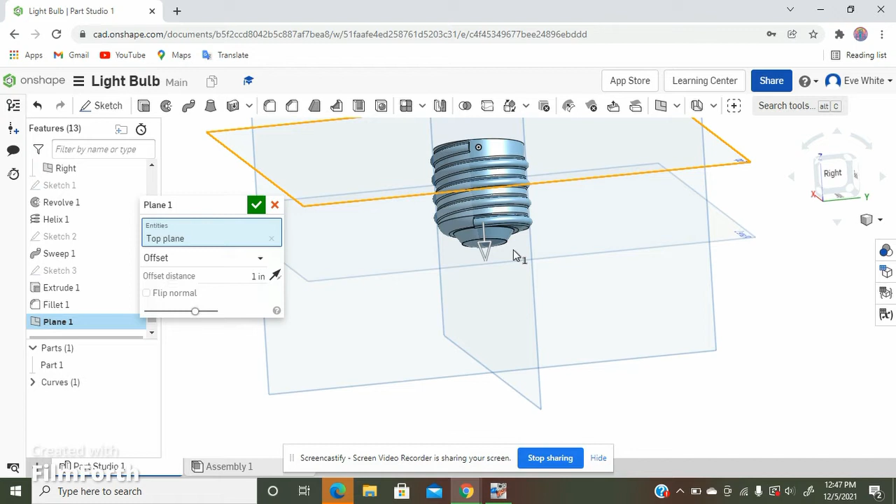To do that, first I need to create an offset plane from the top plane, which will be just below the base of the light bulb. So we click the arrow and drag it down so that it's below the base.

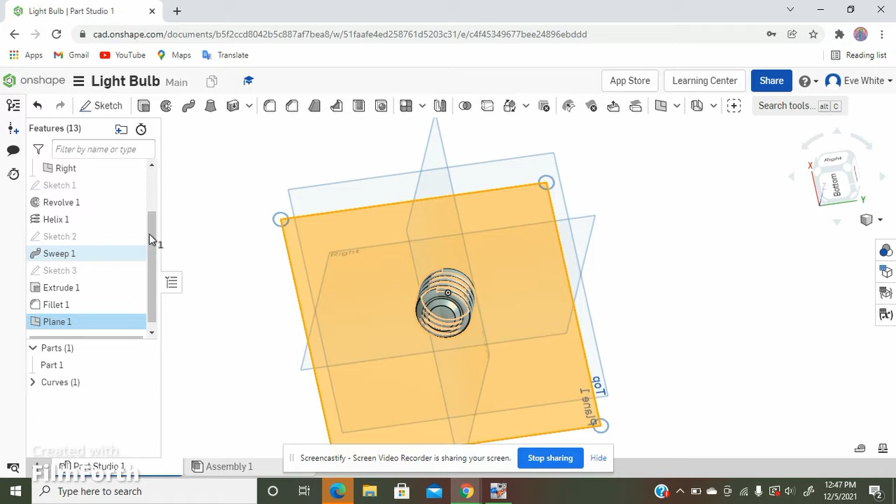Alright, that's good. So now I'm going to click plane 1, then click the sketch button, because in this sketch I need to trace out the part of the thread that I need to remove. To get an exact tracing, I need to use the use tool.

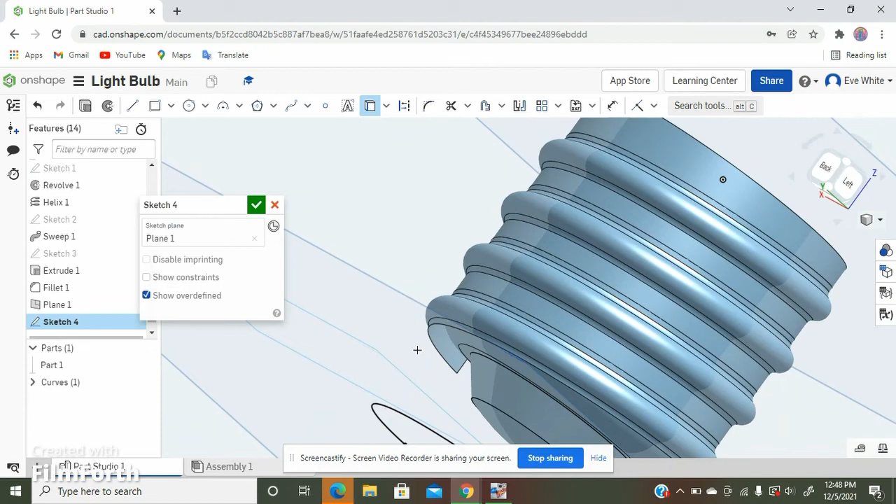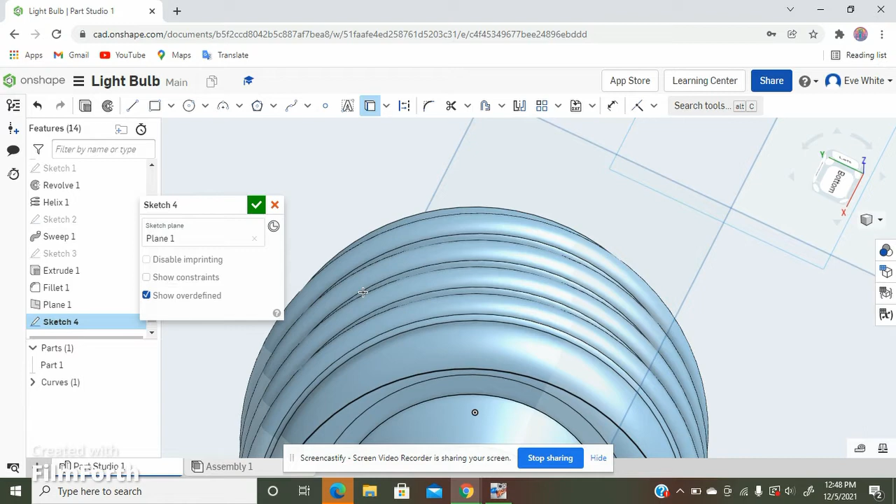The edge of this thread is here, and just where I want to stop removing thread, I need to click on this intersection point here. Now I have to click on the outer edge, if I can do that. Oh, looks like I can't. But that's okay, because I can just estimate when it comes to the outside of the thread.

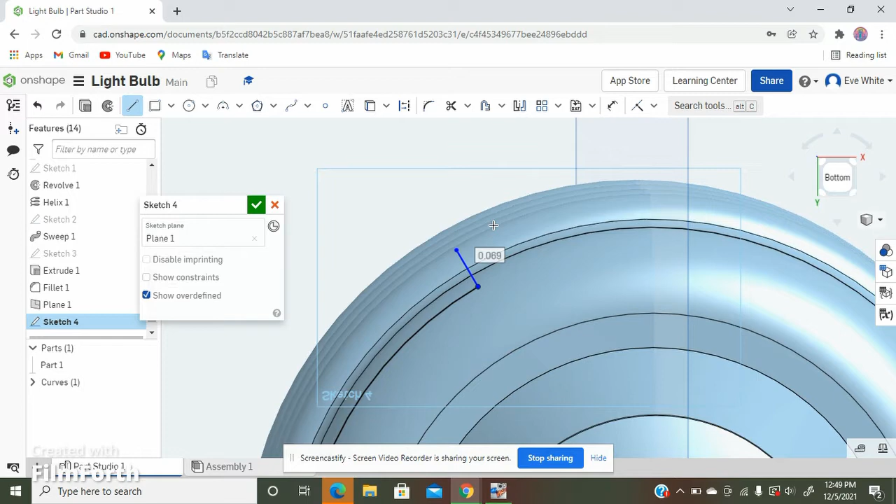So what I need to do is make a straight line here, double click, and this is where I want to stop cutting the thread, because as you can see this is where it stops going over the base, hanging out outside of the area.

Now, since I already have a line here that connects from the interior to the exterior, I just create a line connecting those two.

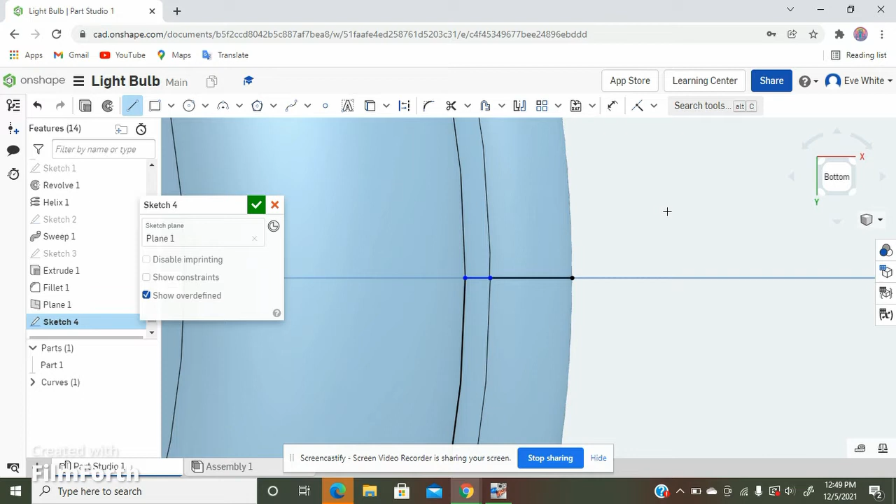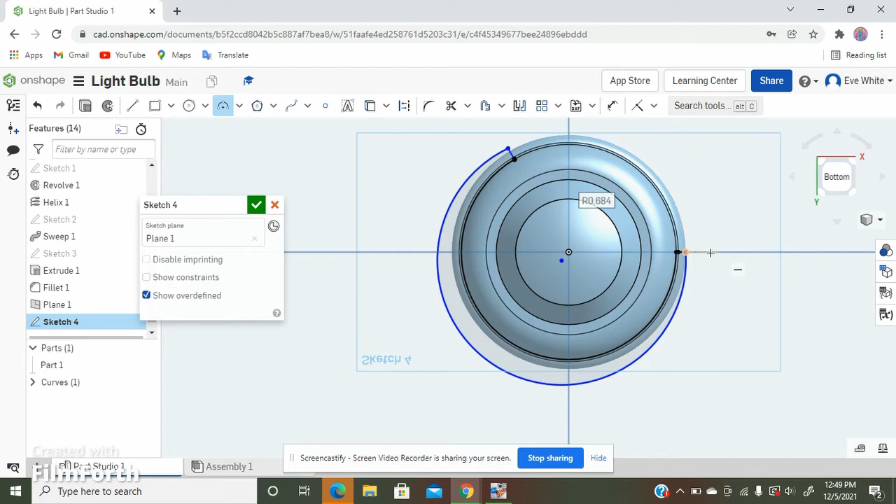And now to connect all the way around, I am going to click on the Arc tool, click on the two outside edges, and then make it big enough to where it does enclose the entire area that I need to remove.

Now you can see that this is a closed shape because the interior is slightly darker than the rest, and so that means we are ready to exit out of this sketch.

Okay, so now I'm out of the sketch and need to make an extrusion of the shape that goes through the thread. Sorry, I kind of lost my train of thought. This definitely shouldn't be this big and shouldn't be on add, it should be on remove.

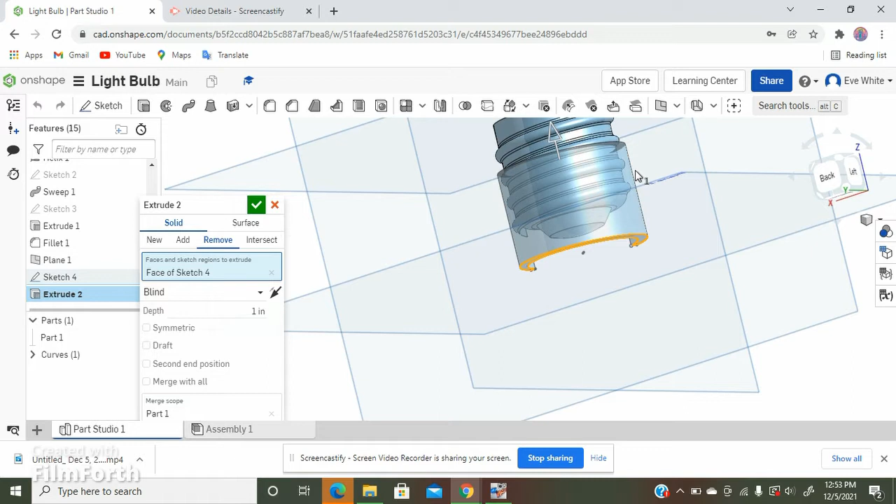It's going the wrong direction, so to change direction you just click on the arrow. I don't want this much removed either, so you can just take the arrow and drag it to whatever depth that you want.

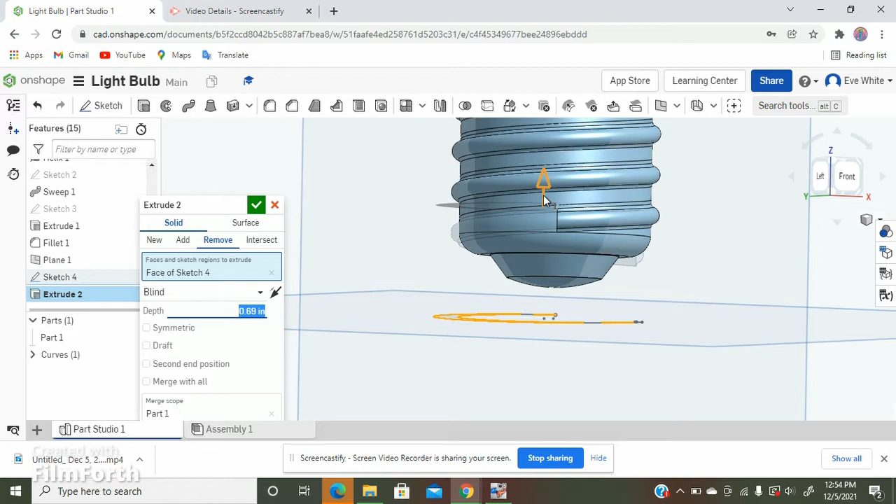My computer is running kind of slow, so it's catching up right now. Okay, this looks like a good depth. Oh, it's a little too much depth though, so just drag it down slightly so it doesn't extrude in as much.

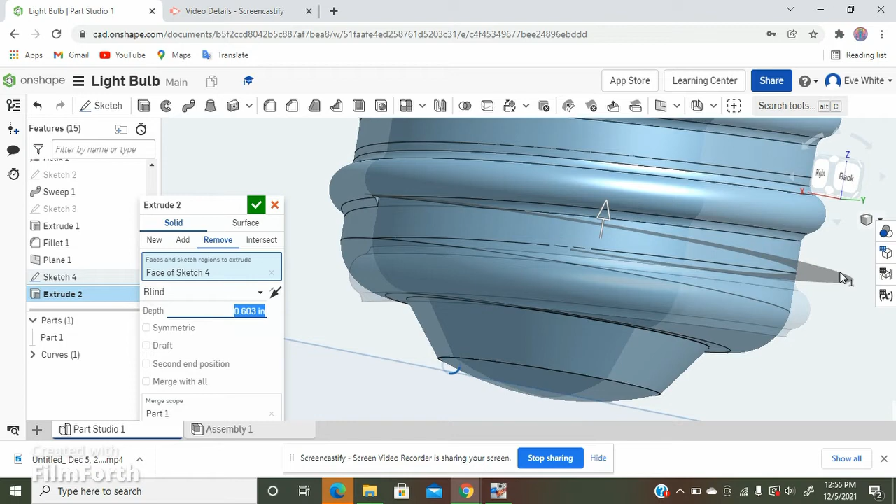Okay, let's see how much this removes. Again, my computer is laggy. It often is. You just gotta do what you gotta do, you know?

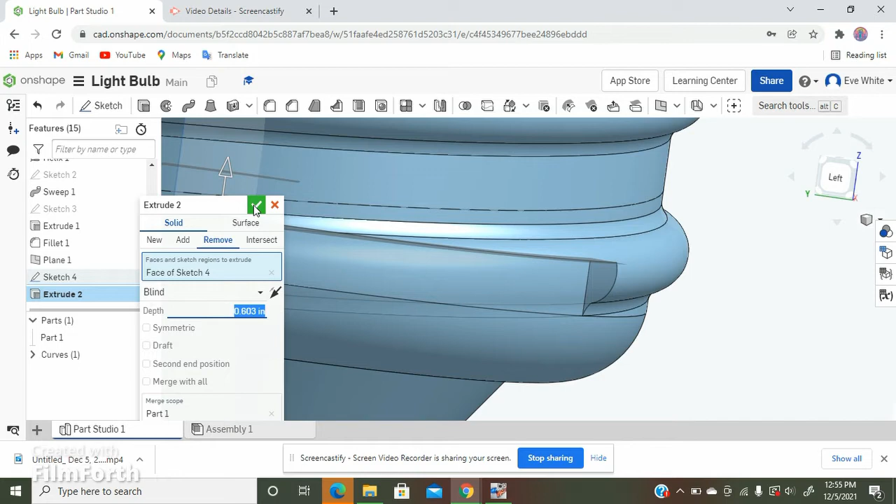Alright, so this extrusion is able to eliminate most of what I wanted to get rid of, but there's still this thin sliver to get rid of.

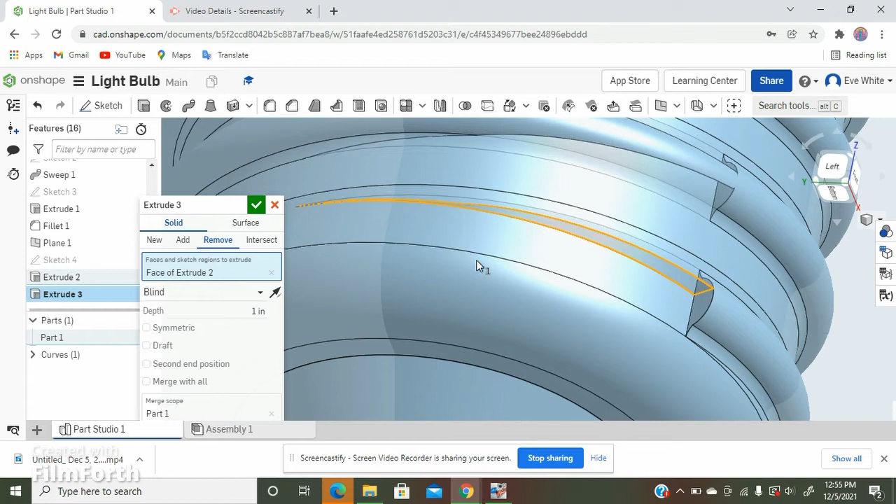So what I can do for this is pretty easy. I can just click on this bottom face and hit extrude again, and it only eliminates this much of the face. Go to remove, and then scroll up so I can find the arrow, and then pull the arrow down.

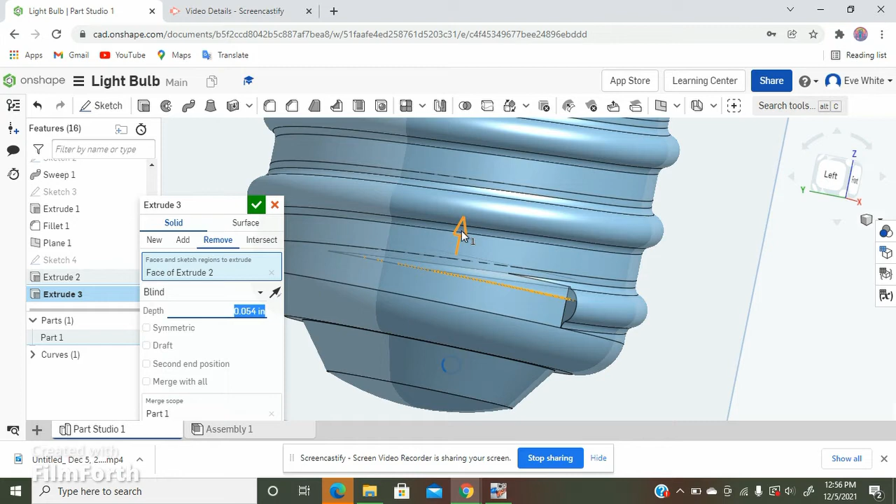It's currently loading. Okay, slightly upwards more. Oh, and now it looks like it has removed all of the excess thread, so I can hit the green check mark and call that part done.

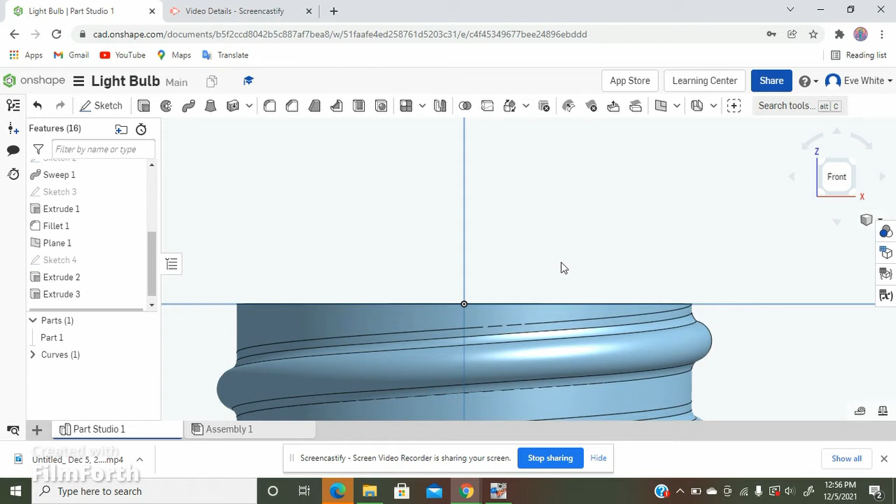Now that the base of the light bulb is all trimmed up, we can finally move onto creating the filament for the light bulb. To do that we will need to perform loft operations, so in order to do that we need 2 end faces.

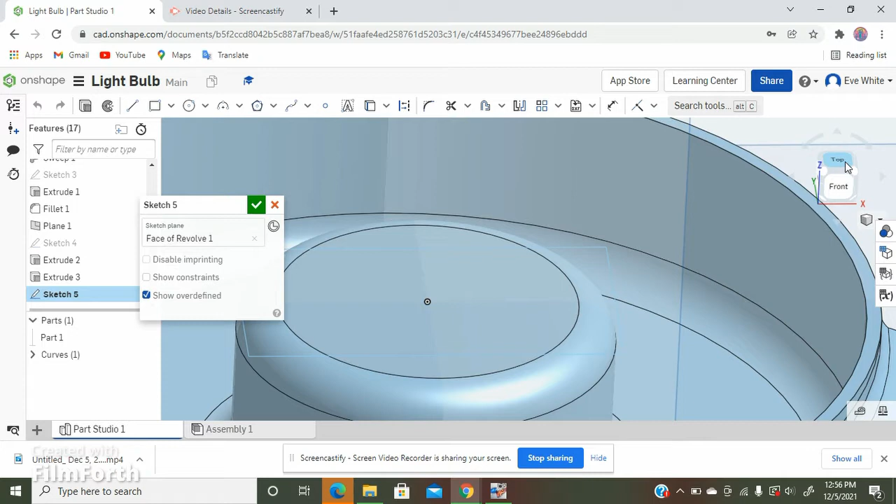3 of the end faces will be on this face right here. So after I've clicked on this face, I hit sketch, then I move my view to the top so I can see more directly onto this face.

Click center point circle. I want a small circle in the middle, and then a circle on this side, and then a circle that's equally distanced from the center as this left one is from the center.

So the easiest way to do that is selecting the mirror tool, which I just did. The mirror line is this plane right here, and then click on this circle here.

Now we can add constraints to this, which will make these 2 circles equal. That way, once I dimension this circle to size, I won't need to dimension the other one because they'll already be equally sized. Let's do 0.05. Then this one will be 0.05.

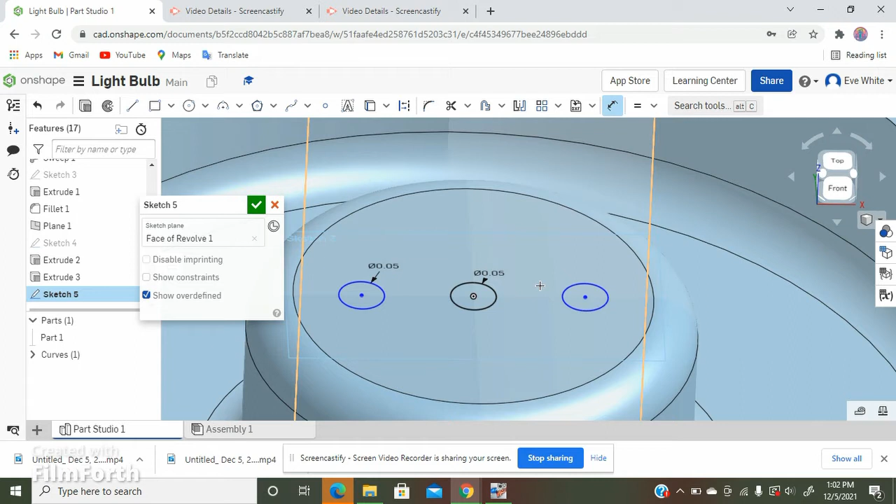Alright, so I have my 3 circles at equal distance. Now, these 3 circles will be the 3 bases for the filament that we are going to create. So, I can hit the green check mark.

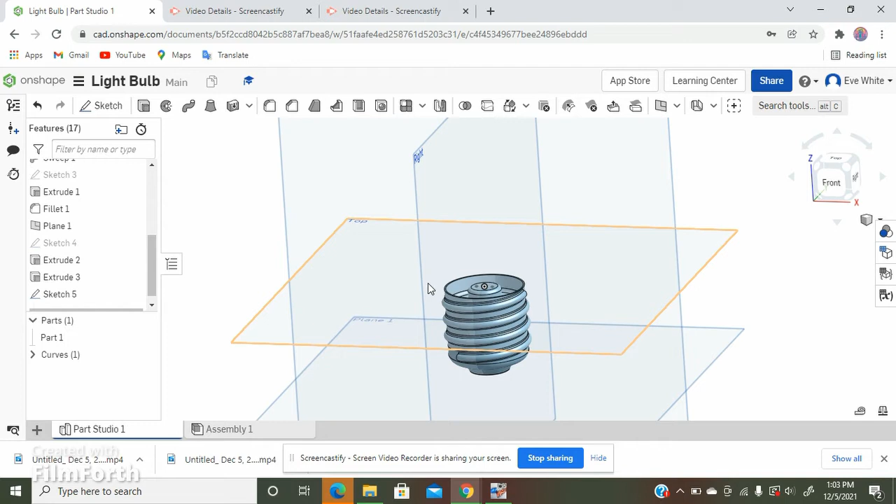Now I'm going to need 2 planes above this top plane. One for the left and right bases and one for the middle, because the middle will be taller than the left and right. So first I'm going to create the plane for the left and right bases.

Let's see, probably should be higher. Yeah. Okay. Just have to wait for the computer to catch up. And it's caught up. So, green check mark.

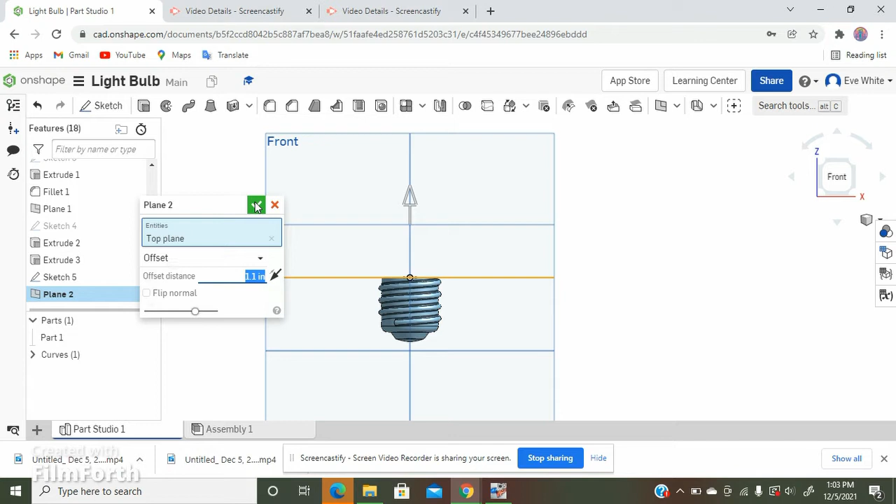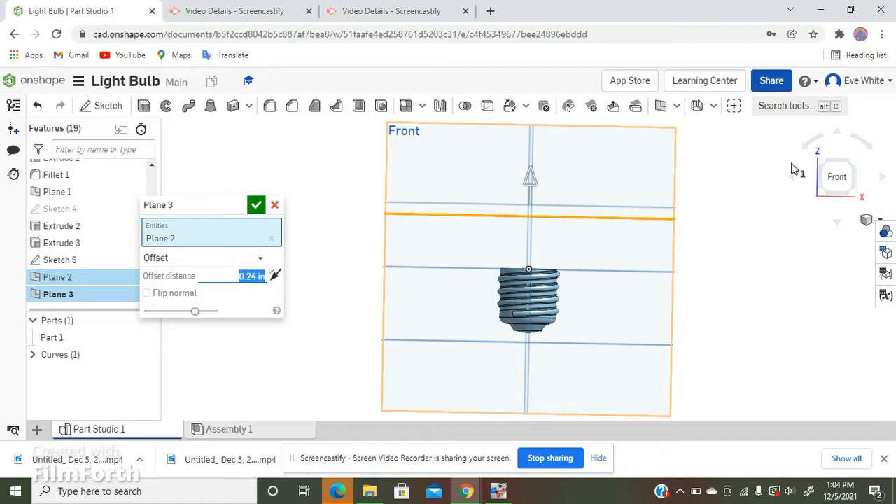I can just offset the plane I just created, make for a shorter distance, so this won't be too much more far away from the top plane than plane 1 or plane 2. Is it plane 2? Yeah, it is. Okay, this is a good distance, so check mark.

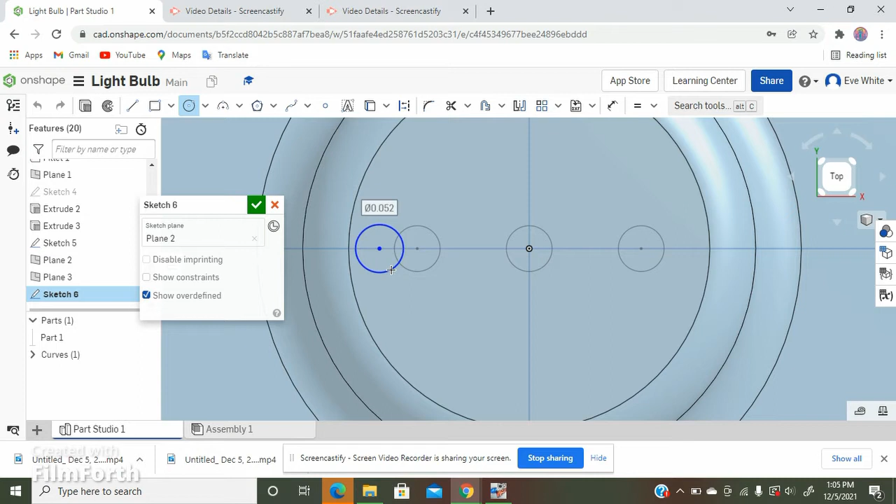Now I'm going to create the top faces. Click on the first plane I created, hit sketch. I can use the circles as a reference. Click, size that to 0.05 inches.

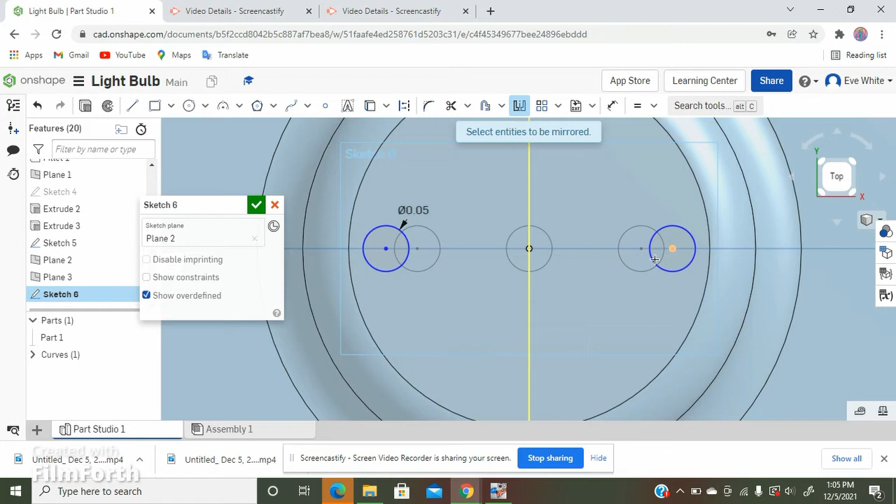Select mirror line, entities to be mirrored. Then I have a circle on the other side, for the other side. And for the middle one, what I could just do is select the use tool, and what that does is bring the middle circle from my last sketch up, so I don't even need to use the circle tool.

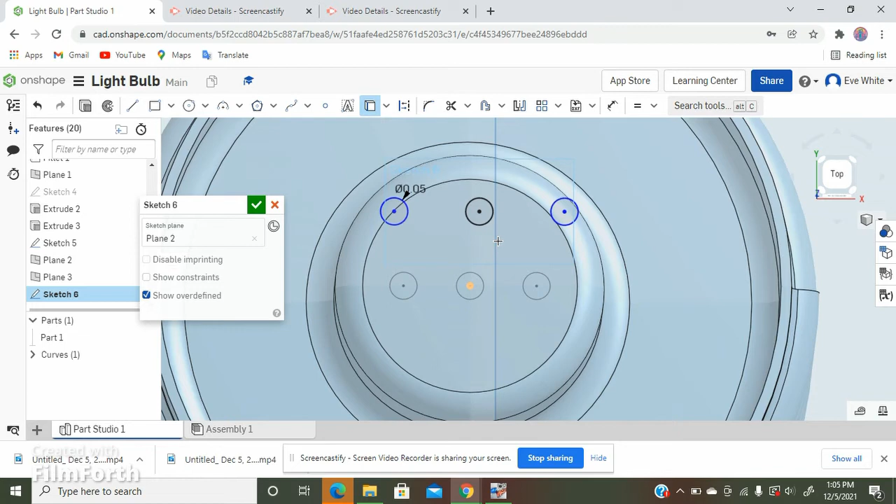Oh wait, actually no, I had to put that on the top plane, didn't I? My bad. Never mind, but you can still do that step on the correct plane. Okay, these two circles are made.

Now time to go to the top plane, where I'm actually going to create the middle circle. And select the use tool. Click on the middle circle. And it's done.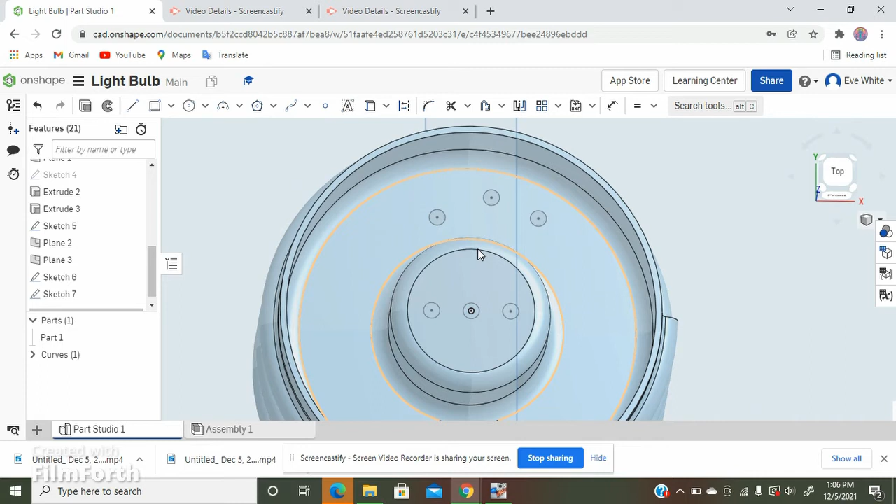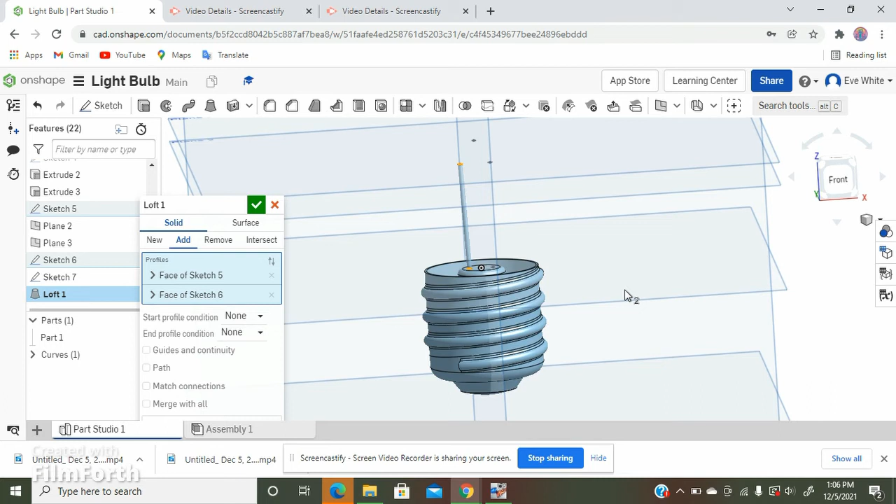Now, to actually create the 3 supporters of the filament, I will need 3 loft operations. Right now I am using loft 1 for the left one, but it really doesn't matter which order you go in. It doesn't really matter. So,

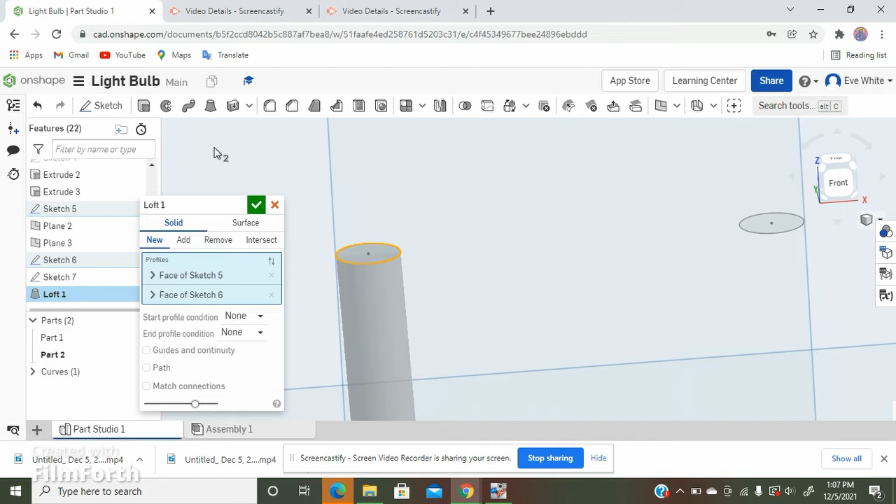As you can see, now the 2 faces are connected. I think instead of add, I'm going to do new. It technically is a new part.

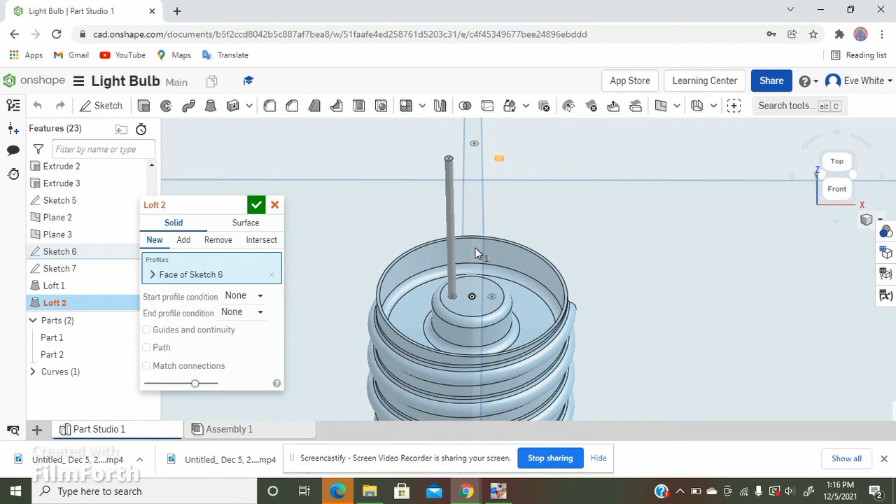Alright, so now I want to loft the 2 right circles. I clicked on this top circle first and then the bottom circle, because in a previous take of this segment of the video, I tried selecting the bottom one first and it didn't work.

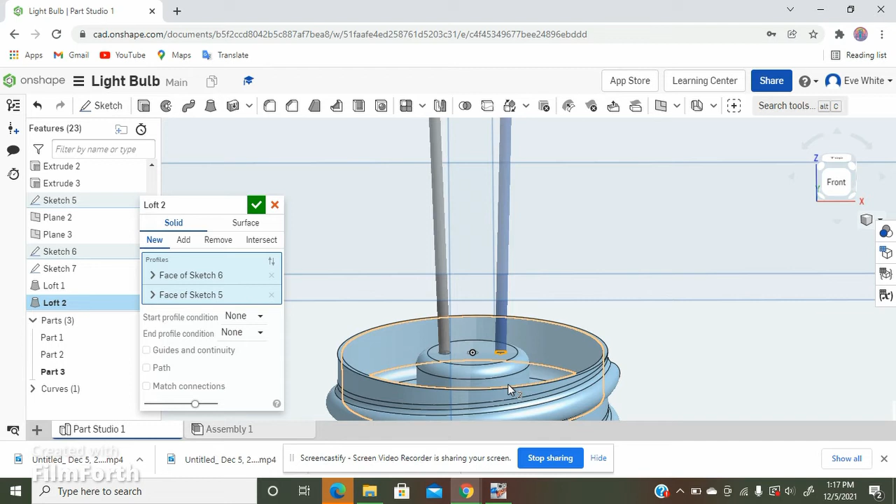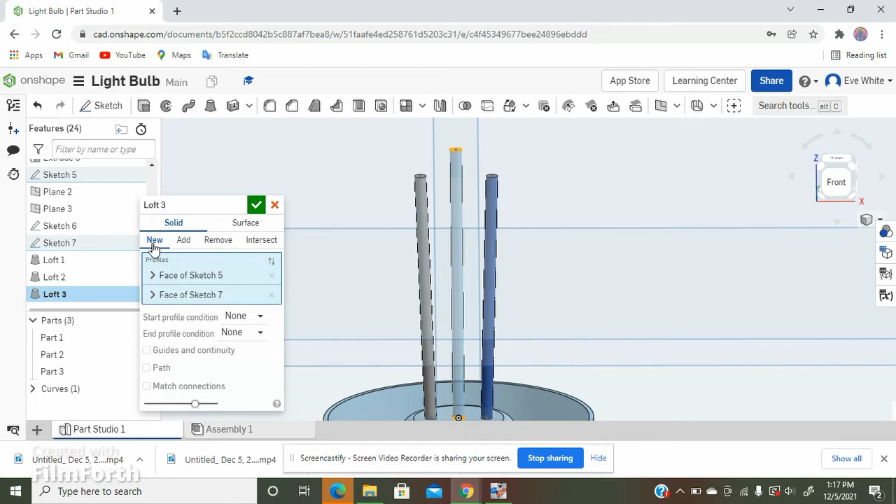So just try selecting top first. Okay, now it is created, and now it's time to loft the middle. Put it on new. And now we have 3 separate rods, which is good. That's what we want. Hit the check mark.

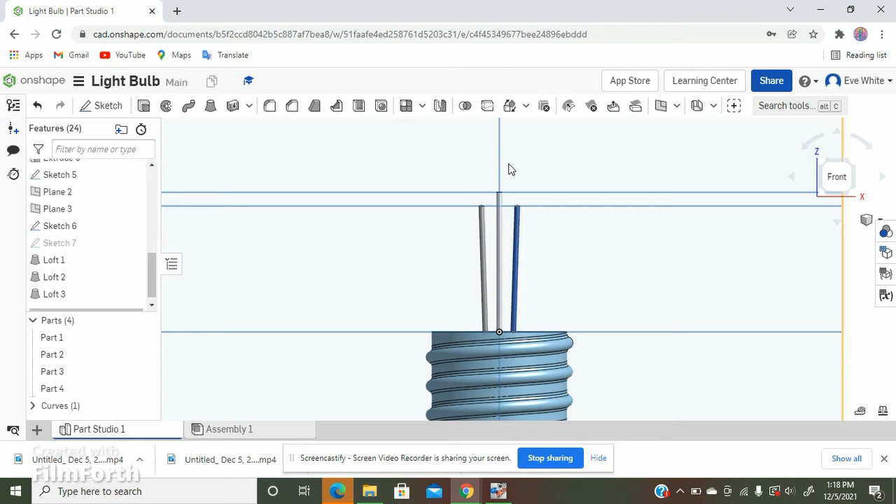Okay, now this is arguably the hardest part of making the light bulb, what I'm about to show you. But it's honestly easier than it looks, thankfully. But before I do that, I'm going to really quickly fillet these edges because I don't want them to just be flat and choppy.

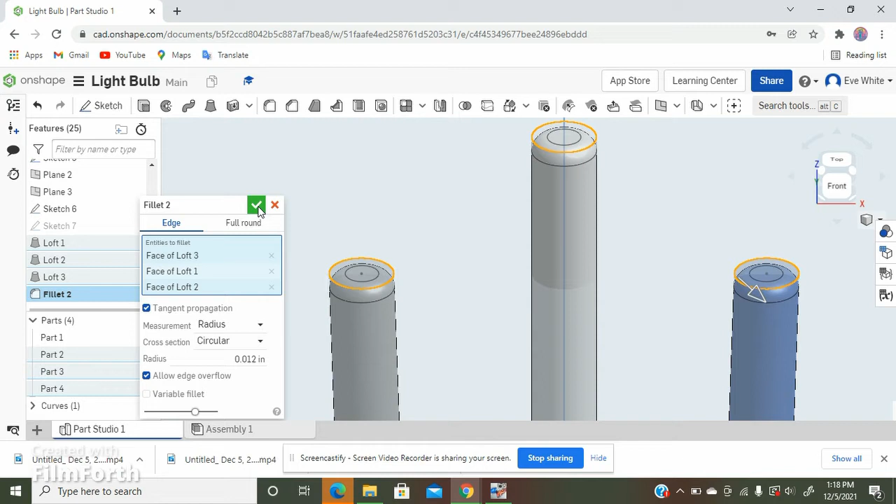I'm going to try to add these. Yep, there we go. Now those are nice and rounded and they look more polished. Okay.

Now, what I need to do next is make sketch 7 visible, because I need the 3 center points that are in the middle of the top 3 circles, because I need planes that intersect them. Now, what I am about to show you guys is how to create the wires that run between the filament.

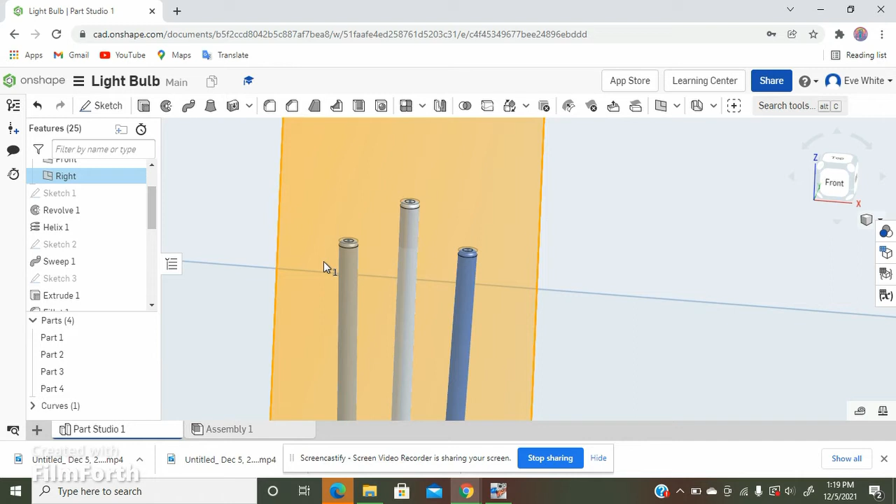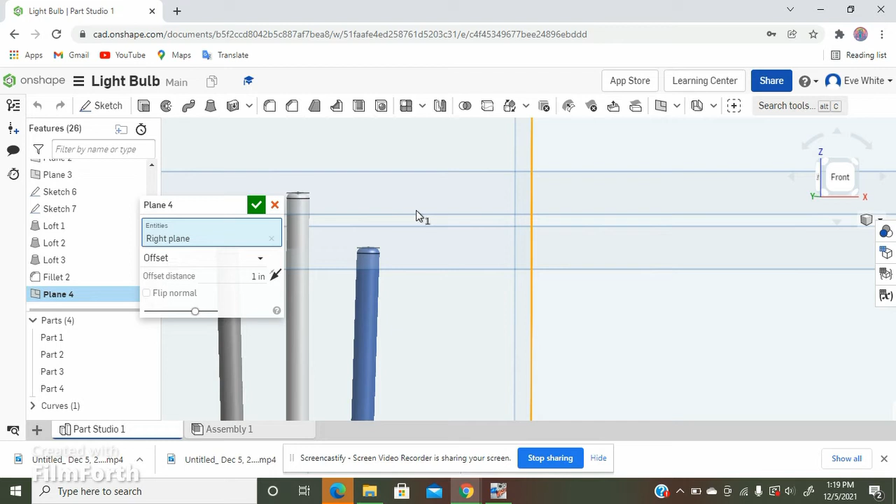So, I have this plane selected, which actually, I believe that already goes through the middle here, so that's very convenient. So now, I need to select center point of this circle, and instead of offset, I want it set to plane point. Now, there is a plane right there.

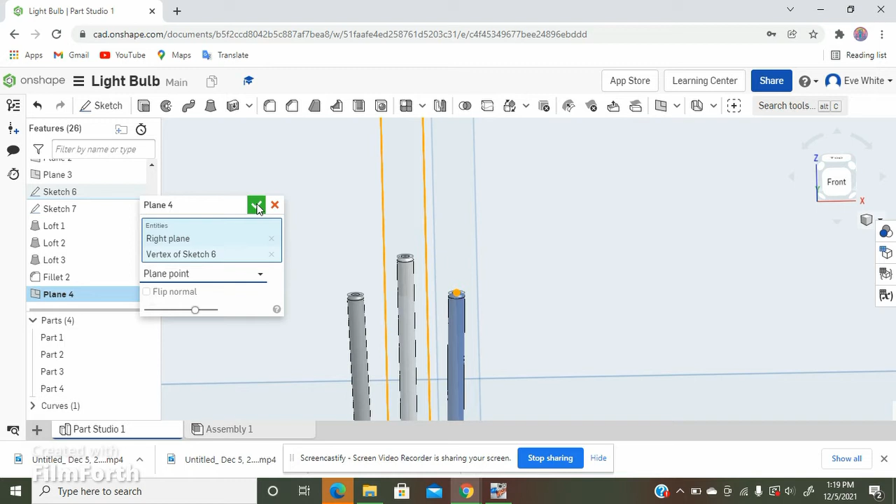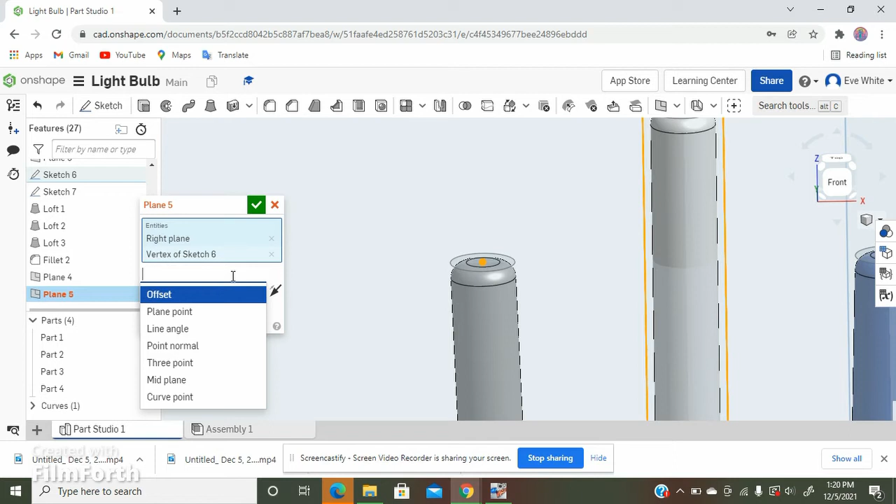Now I just need to repeat the process for the other side. So, select this plane, select the plane tool, select the center point of the circle of the left side, plane point, and now there's a plane for that side.

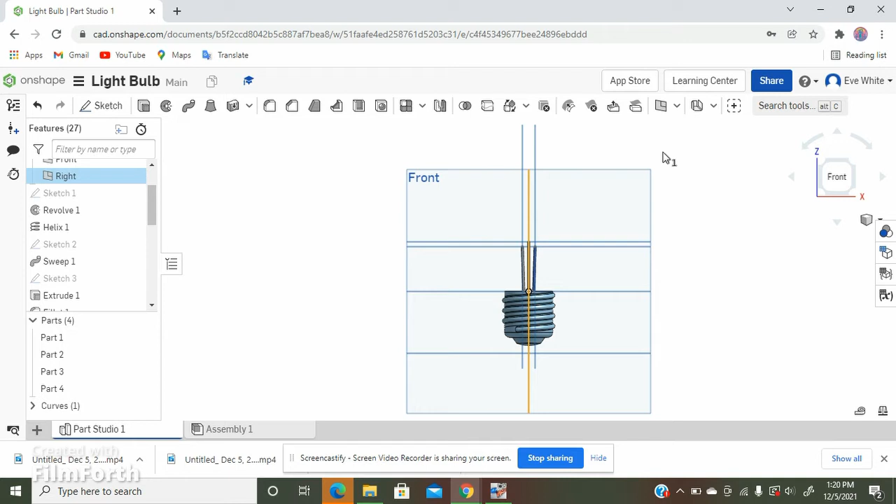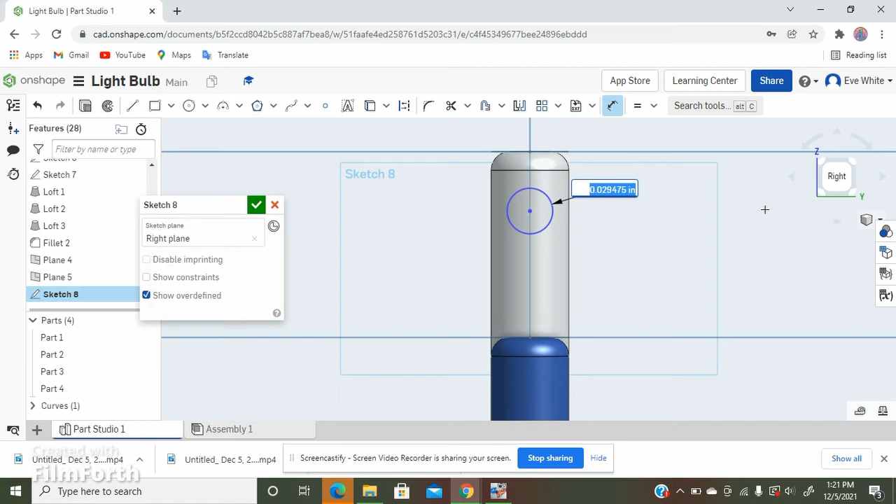Now, I need to create 3 circles on each plane. So, hit sketch. I am going to do the middle one first. So, have it here. Now, I want a very small circle that fits within the parameters of this rod here. So, I'm going to dimension this to, let's make it 0.01.

Okay, that needs raised up.

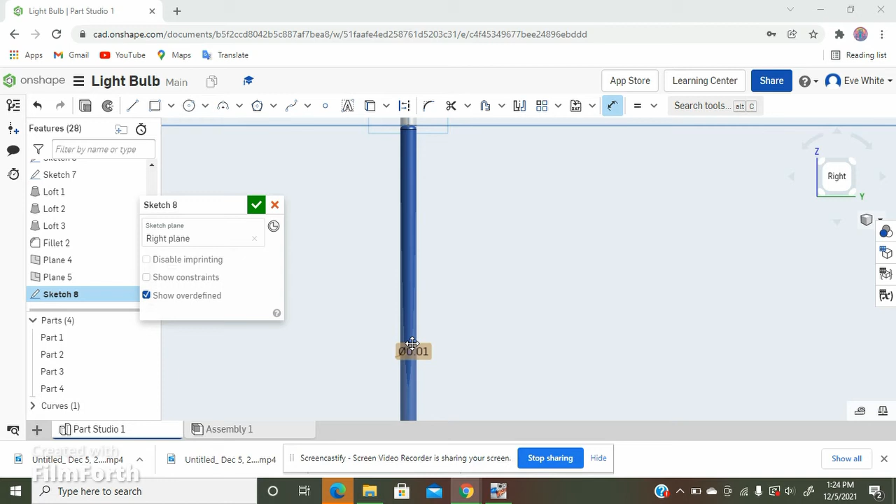Sometimes when you dimension objects or entities, it moves them far away from where you actually want them to be, and usually what you can do is dimension them to be back where you want. So I can click on the circle and then click on this line here so I can set a custom distance.

Oh wait, I hit the wrong thing. I wanted this middle one. And then I click the edge of the circle.

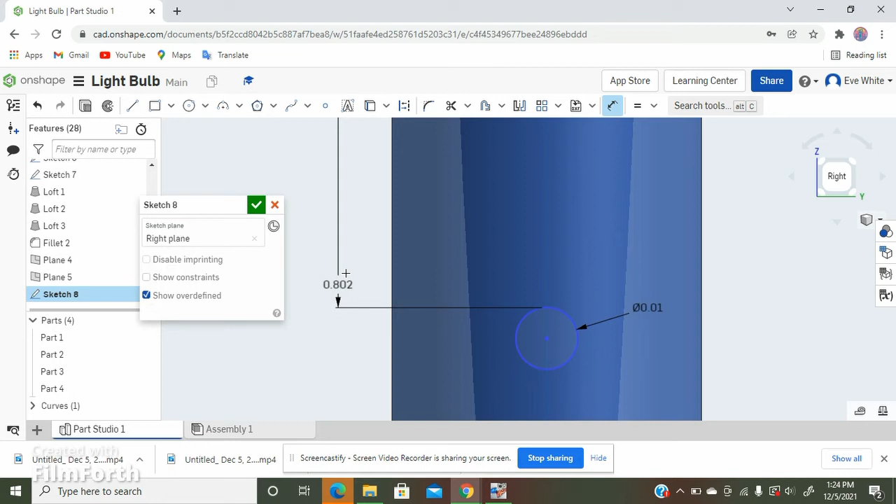And instead of 0.802, I think I want 0.1. Alright, that puts the circle there.

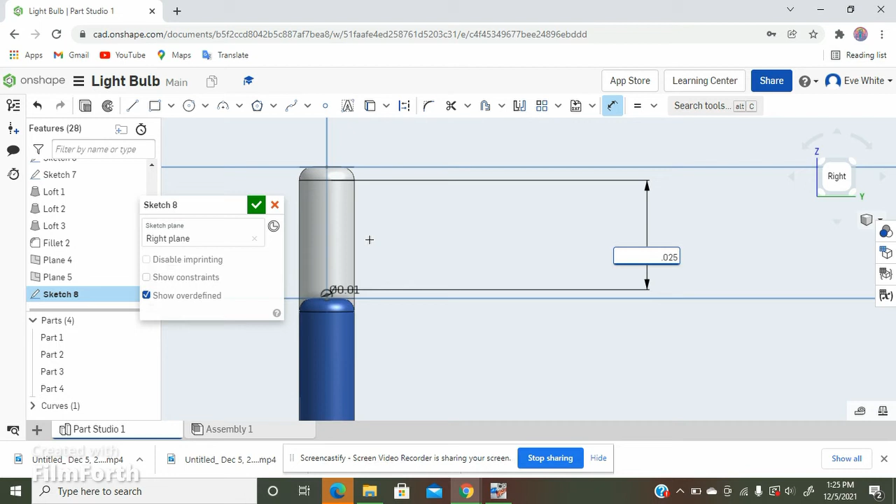Well, in that case, I want 0.025 because that is 1/4 of 0.1, and I want it to be about 1/4 of the distance it is now. Okay, this looks good. I'm going to hit the green check mark on this sketch.

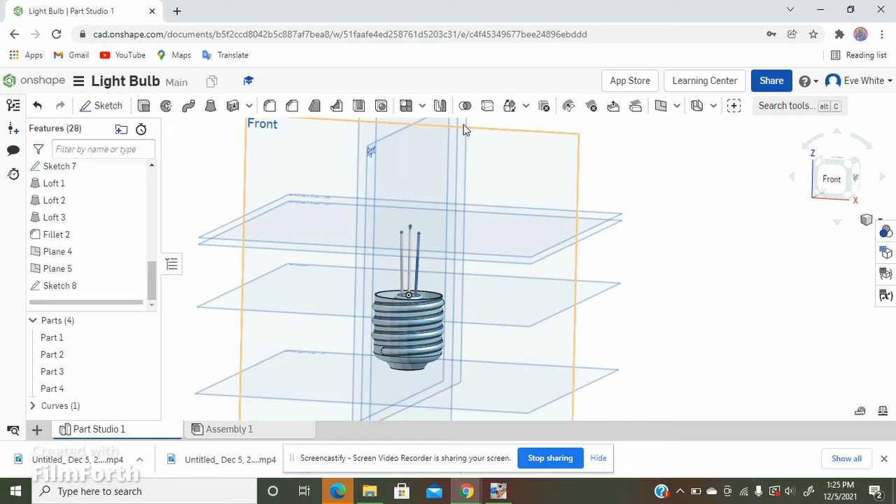Now I need to repeat the process on one of the other two sides, so next I'm going to do the right side. Yeah, that is the right plane. So, sketch, you go down to the blue rod and create a circle.

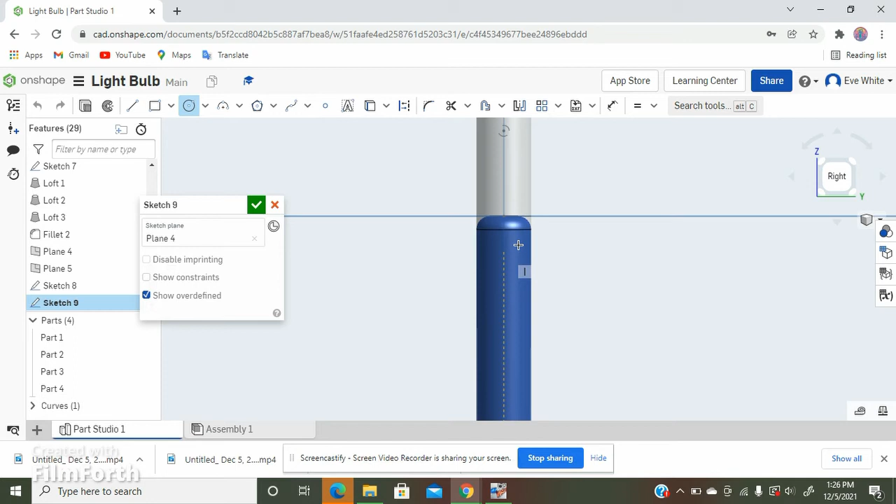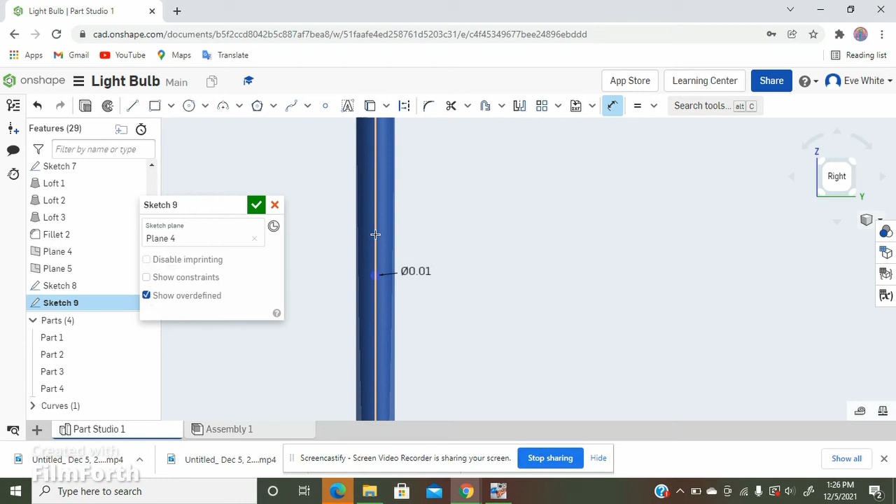I'm going to dimension this to 1/100th of an inch. And it looks like it moved it again, so we have to dimension that ourselves. Oh well, so I'll have to dimension it to this plane then, because I cannot dimension it to that curve.

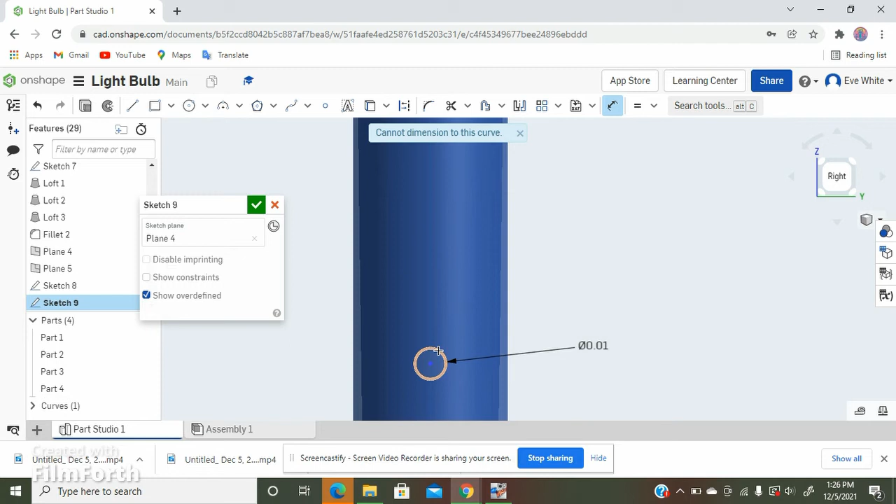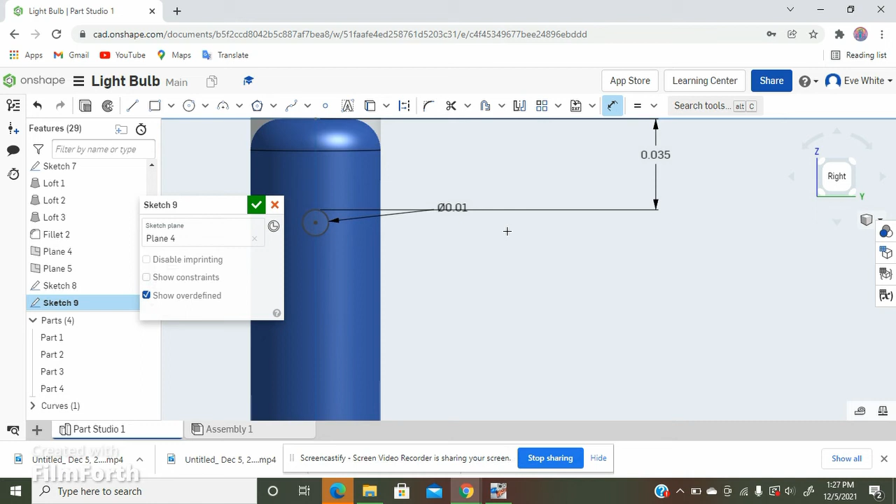Alright, I'll make it 0.035, see where that gets us. Okay, that looks pretty good. That's pretty good.

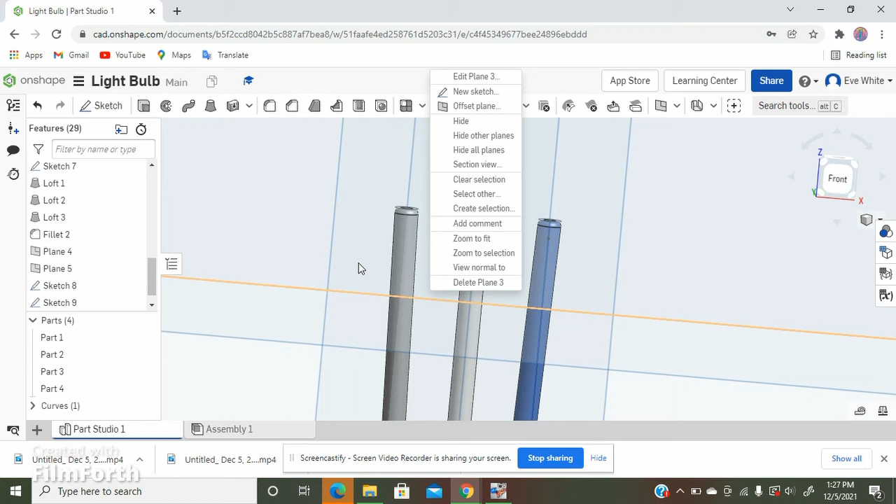Alright, now to do the same thing yet again on the left side, so select the left plane, hit sketch. Now this will be easier because I can just select the Use tool here to project the right sketch onto the left one. So as you can see, now I have a circle here. Now we have our 3 circles.

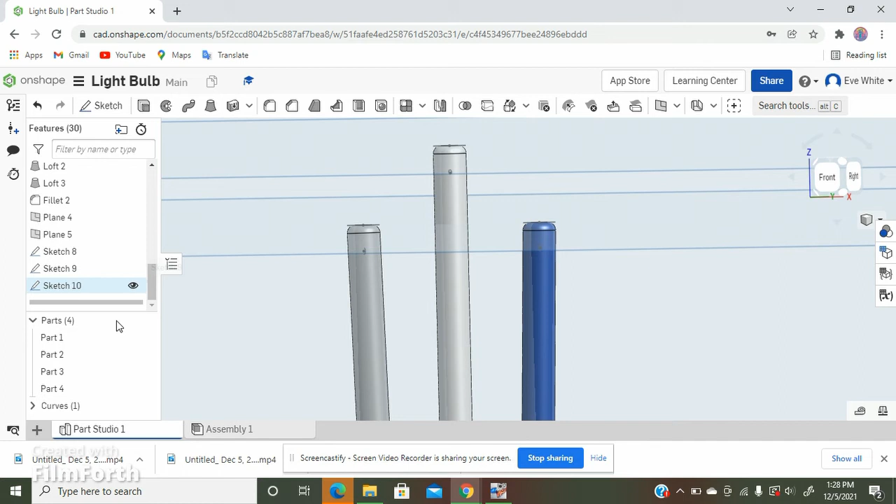Time to perform the last loft operation. Sketch 8, 9, 10. So I will start with the left side.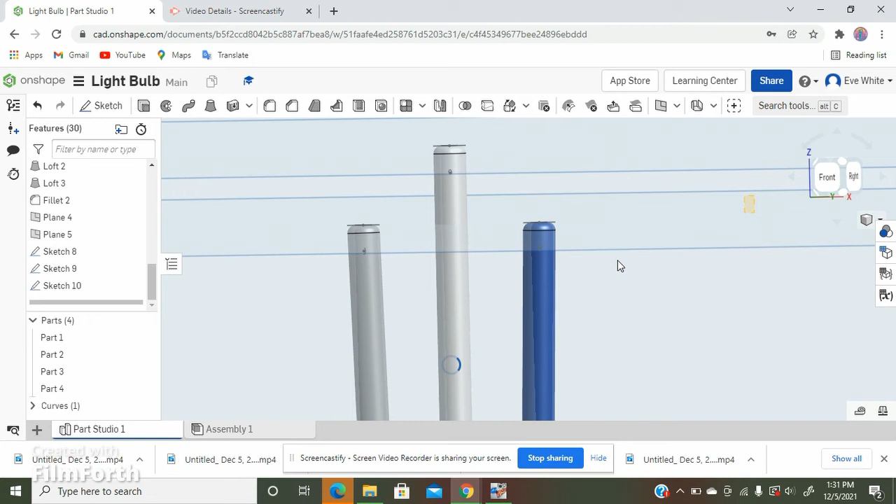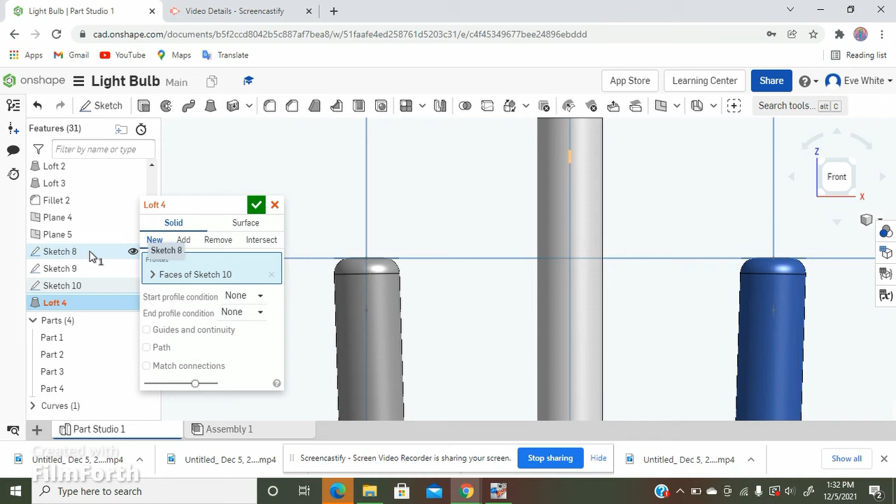Okay, so I'm going to move to the front, and then select the loft tool, and then select sketch 10, and is 8 the middle one? Yes, it is. So now, as you can see, it has created a connection between these two sides, and that is the wire of the light bulb.

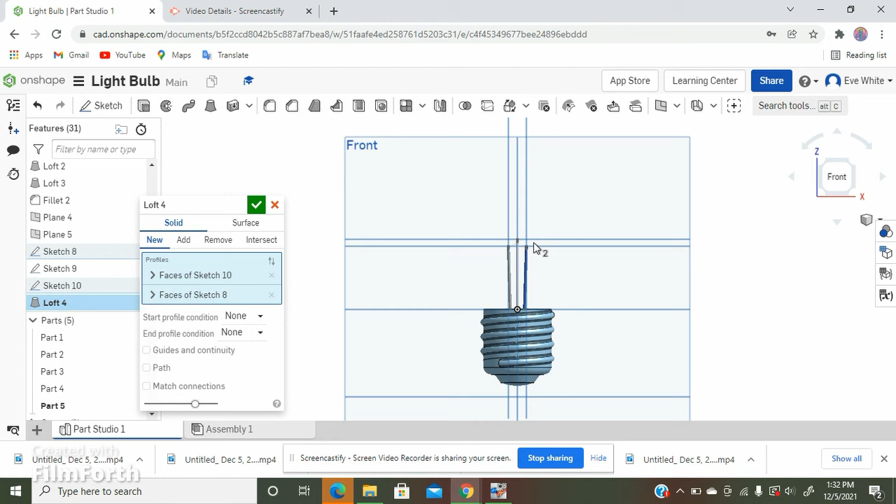Okay, so that was a successful loft, but now our circles went away, so we need to bring those back. Well, only the middle one, we're done with the left one.

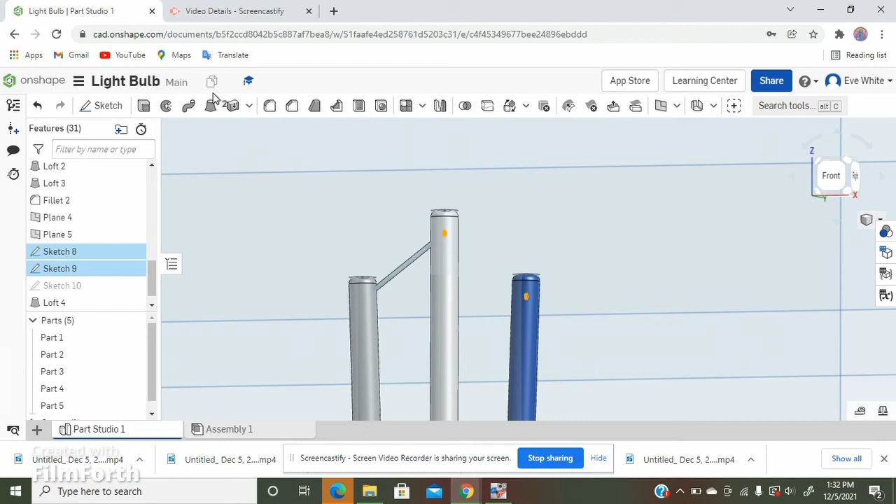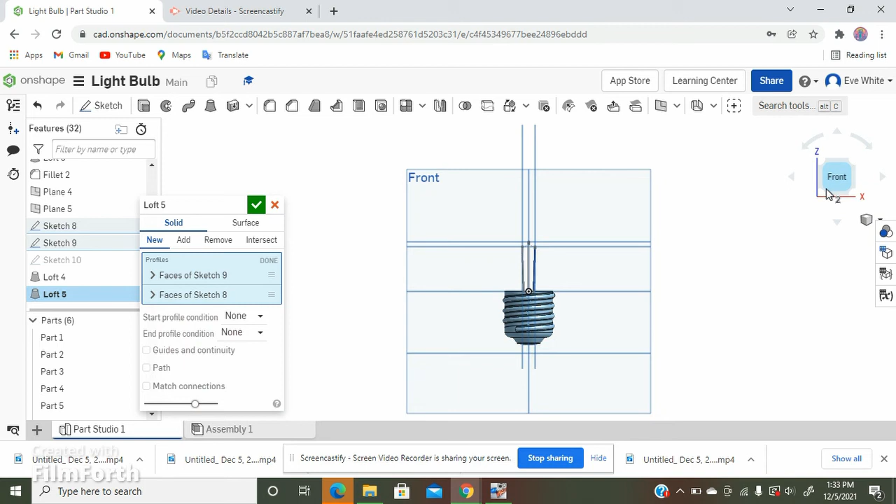Select sketch 8 and sketch 9, select the loft tool. Oh, do these need switched up? Okay yeah, that was the problem. Alright, now we have our other wire.

Now there is actually a way to make it so the wires aren't straight, where they kind of go down and then up, more like a realistic light bulb. I'm going to try that, but it may not work because operations like that don't always work, especially if the cross section intersects with itself.

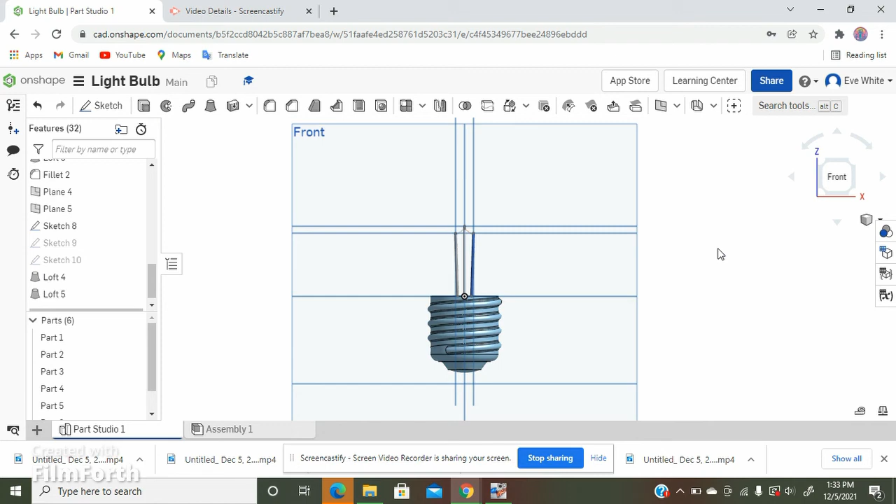So just going to check out of that for now, and then to the front, because this front plane intersects all three rods and the wires. Now, to make a continuity, well, not continuity, but path for the loft function, you need to make sure it connects between all the faces.

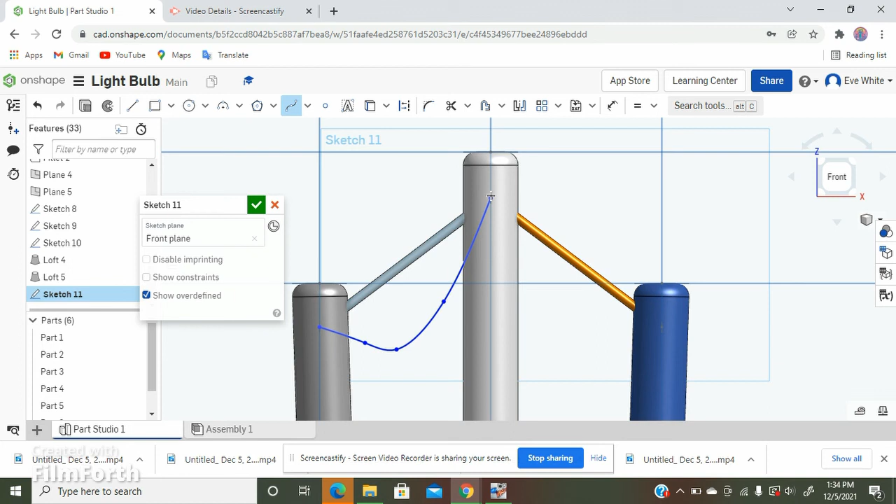So now we actually do need to bring back those old sketches. And now, to make a curved connection, I'm going to use the spline tool. You could go down slightly, and then I'm going to make it go up. Okay, now this is kind of bent incorrectly, so I'll just take this point and move it to where I need it.

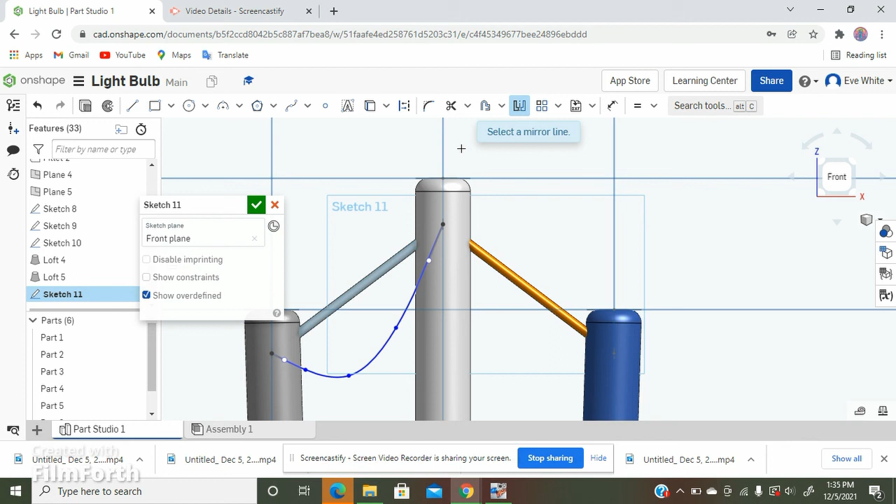Okay, now I'm just going to mirror this. Now we have two paths. That's good, alright.

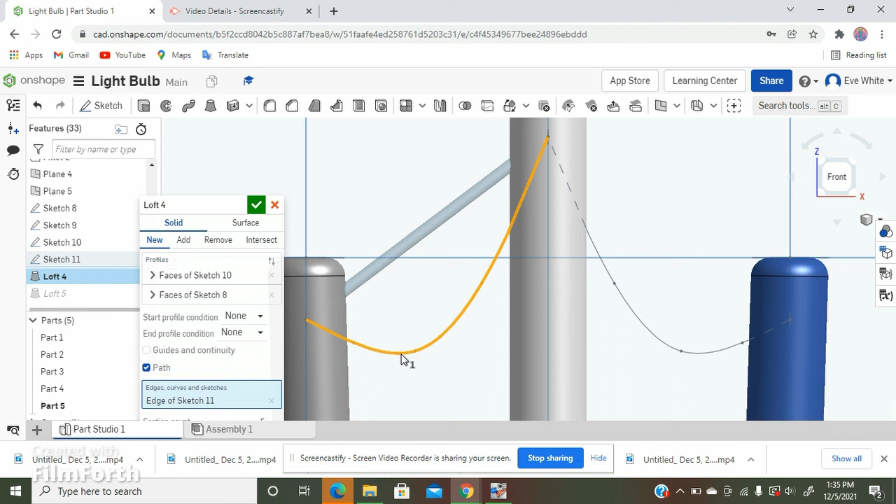Now I'm going to start with the left side. Oh wait, first off, I need to actually move this sketch up before the lofts, or else when you go into these lofts, it's not going to let you access this sketch because it was made after you made the loft. So I'm going to click on Path and click on this curve, and it looks like it did work. So we can have a curved wire here.

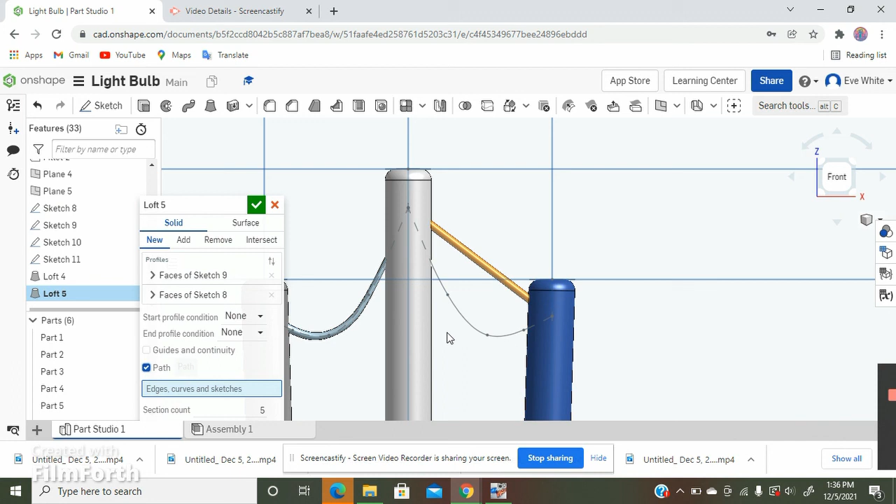Now the other side, double click this. Actually click the eyeball on sketch 11. Select path, select this wire. And that worked too, so this was best case scenario. And now this looks more like a realistic filament.

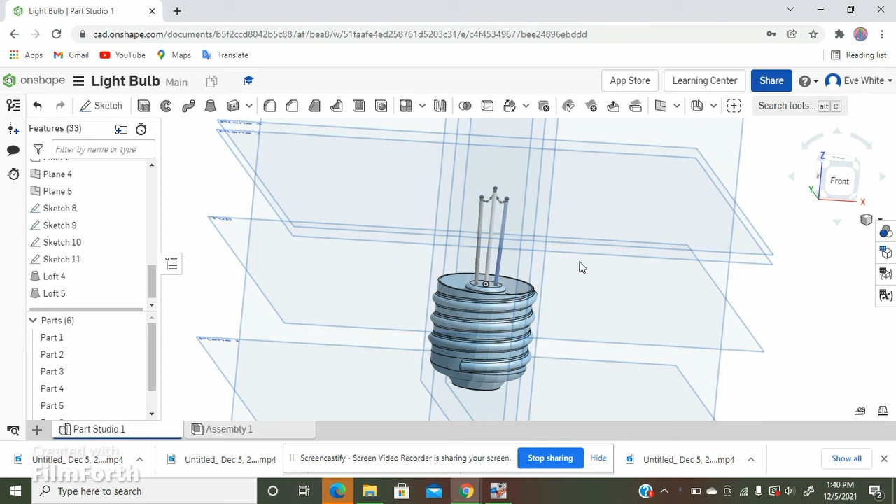Okay, so this basically wraps up what I wanted to cover in part 2 of the light bulb project on Onshape, on my channel.